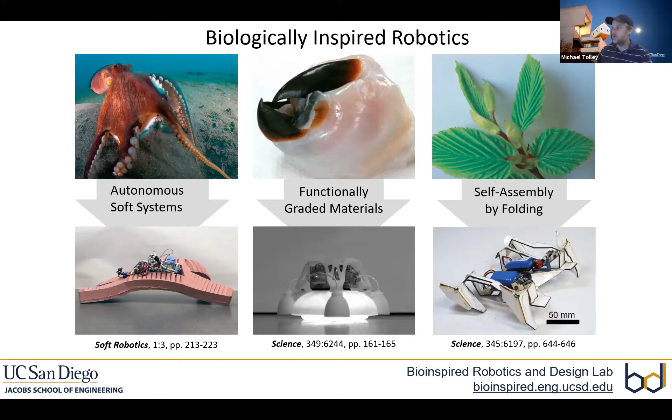I know this school is focused on rehab and wearable robotics. We have some projects that touch on that, but I'm going to focus more on the fundamentals of soft robots and how to make them and design them.

I would argue that the assumption of rigidity has, for most of robotics, been central and fundamental. The reason is that the things that allow us to sense the world, to sense movement and deformation in robotic systems, are usually expensive. So the typical approach to robotics, as in the video you see here, has been to design our robotic systems to be as rigid as possible.

What that allows us to do is assume that all the motion in a robotic system happens at the joints. You put a sensor at the joints, you can come up with a model to predict the motion of that system, and then you can get very high precision and accuracy in the control of the end effector position. If you want to do a manufacturing task like you see here, that's very beneficial.

The flip side, the downside we don't hear about as often, is that in order to get that precision and accuracy, that assumption has to hold. You have to have perfectly rigid bodies. Wherever you don't have joints, you have to have no deflection.

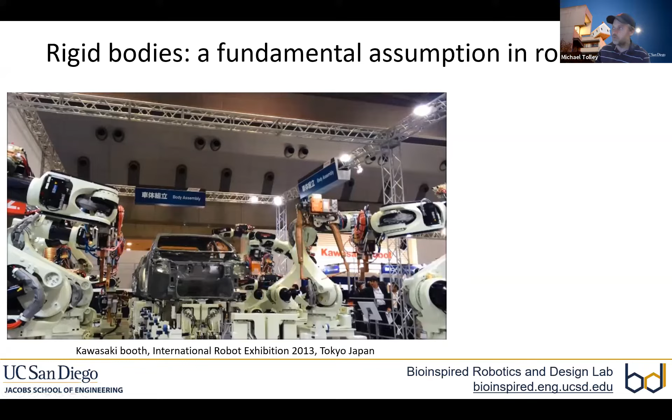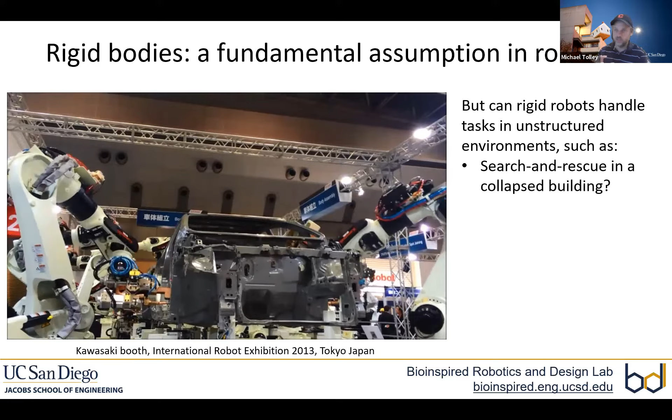And in my view, that's essentially what we're talking about when we talk about soft robots, is getting rid of this fundamental assumption. And especially if you're thinking about the kinds of things that this school addresses, search and rescue in a collapsed building, inspection of a damaged nuclear power plant, or assisting humans with daily tasks, there's a lot of potential upside to thinking about soft, deformable robots.

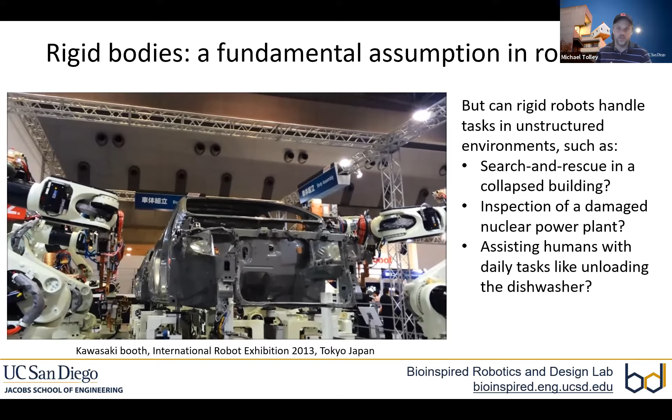Of course, that approach also presents a lot of challenges. So if you have a body like the octopus here that we see that can deform continuously, has no rigid parts, it can squeeze itself through all sorts of small apertures like the one you see here.

The downside of that is now you have to sense everywhere, right? You have to, in order to understand the shape of your body, have sensors all throughout, which is expensive, a ton of information. You have to figure out how to synthesize that information to understand the state of the system and in order to control it. So these are very non-trivial challenges that the soft robotics community is now starting to address.

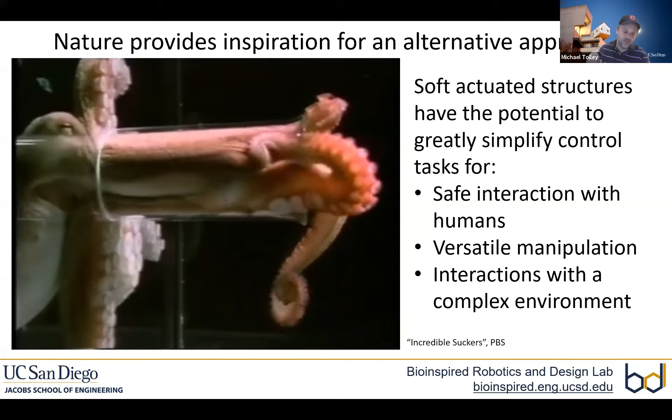And you usually end up, the approach people normally take is they simplify this problem in one way or another. But the potential of this, if you can do that, is you can have a system that is inherently safe for interaction with humans, that can achieve versatile manipulation, and that can have complex environments, interactions with a complex environment, and employ the materials that the robot is made up of in order to simplify those interactions in some way.

Okay, so I'm going to give some examples of recent work from my group that has sought to do this, thinking about questions like how can soft legs simplify walking? How can the control of stiffness be useful? How can a soft body be beneficial for swimming? And thinking about adhesion, sticking to things, and where soft structures can play a role. I will go through these fairly quickly, and if you have questions, I will be happy to address them.

This is an image from a review paper that I wrote with Daniela Rus about 6 years ago now. And even then, there were many people in this soft robotics community thinking about how to move around the world and interact with the world. This is just some examples. Often we're looking to biology for inspiration because that's where the examples of soft bodies are that we see. And so you see here robots inspired by fish, worms, snakes, manta rays, etc.

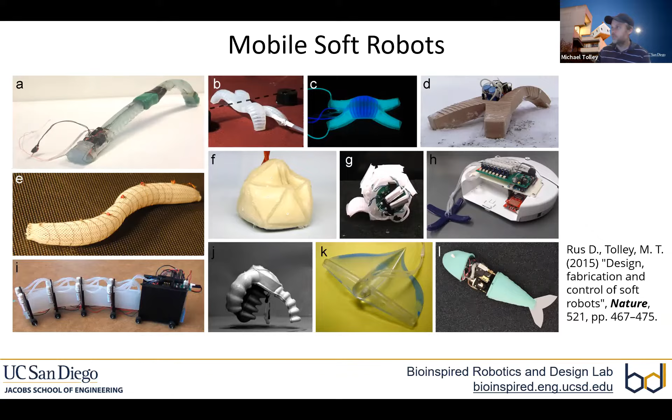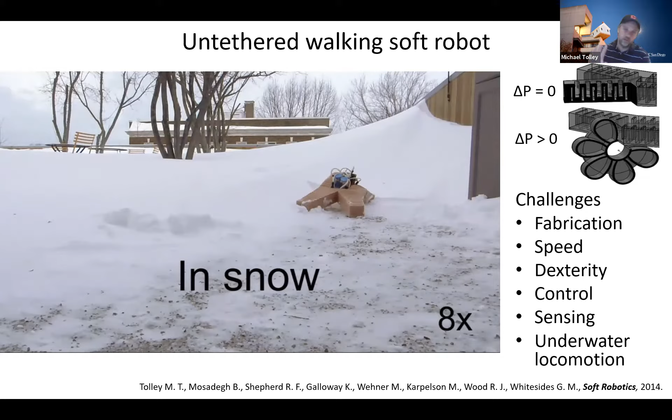So zooming in on one of those examples, this was some work from my postdoc in 2014, with Rob Shepherd, Rob Wood, George Whitesides, where we looked at can we make a large-scale soft-bodied walker?

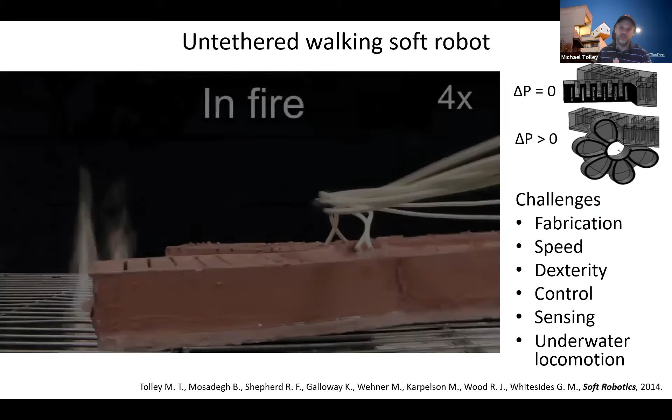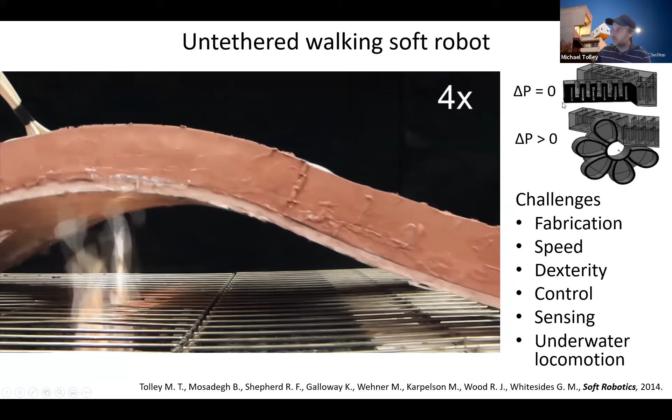And the way that we do this is using the most off-the-shelf components we could. We essentially have patterned channels within a soft elastomer body. And when you pressurize these channels, when you inflate them with a strain limiting layer on the bottom of these limbs, you can cause the limbs to bend, right? So it's a very simple concept, and we're just taking advantage of the fact that the pressurized air is going to naturally distribute to achieve a sort of continuous deformation over the body.

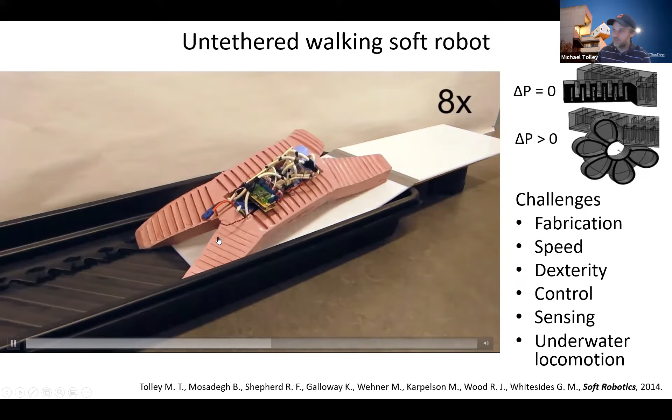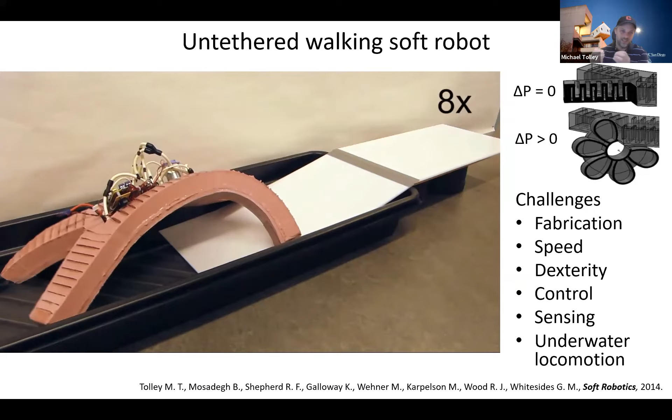Of course, it's not always as simple as that. You can even see in these videos some places where you have the Mullins effect with rubber, which means that you get one part of your body that gets a little bit weaker, and now the next time you pressurize it, that's going to be the place that stretches a little bit more, and now it has more exposed area. And so it's a sort of positive feedback where you can have aneurysms.

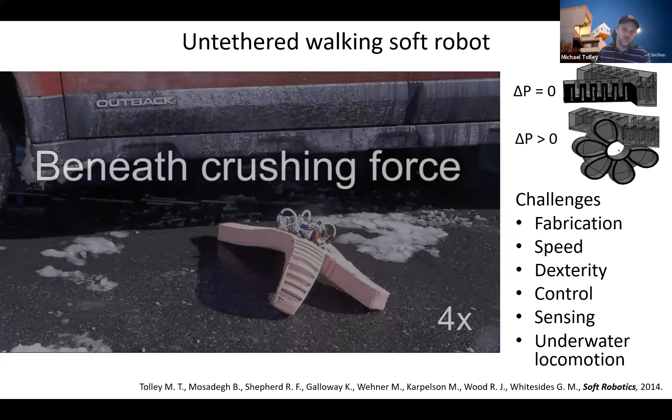And these are things that we see in biology, right? These are things that we want to avoid in our own cardiovascular system. And so challenges that nature has solved by, for example, using fiber wrappings around our vessels and pressure vessels in our body to try and minimize, but at some point you're not going to get rid of them completely.

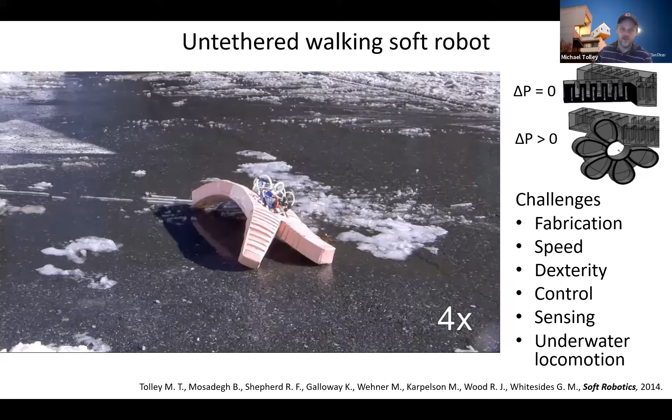The point here is that when you address some of these challenges, you can design a soft-bodied walker, and it has some nice advantages, like you can drive over it with a car, and it's going to be able to continue walking. One of the main challenges with this approach was the manufacturing, the fabrication.

So we started to move towards, rather than 3D printing the molds, we thought about, could we directly 3D print the system? The advantage of that is we have multi-material 3D printing technology coming online that allows us to do things like not just print flexible or rigid components, but combinations of the two. And we can print them in stiffness gradients, where we gradually transition from rigid to flexible. That's something you see in nature, because you don't want the stress concentrations that occur when you have a very abrupt transition.

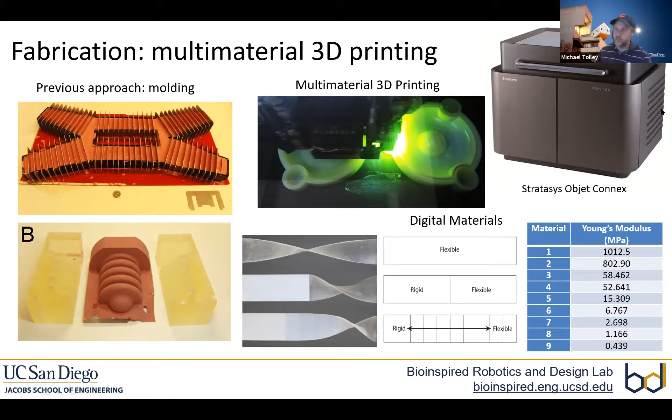Using this Stratasys Objet Connex printer - not meant to be an advertisement - we were able to print over 3 to 4 orders of magnitude of modulus. There are other technologies coming online every day bringing new and improved materials. With this particular printer, one challenge is these materials tend to be very viscoelastic, so there's a lot of energy loss in deforming them compared to something like silicone rubber. That's one of the trade-offs there, but these materials continue to improve.

One thing we were interested in, back when I started at UCSD, is we started thinking about how to print an actuator that can bend about 3 axes. Instead of a single controlled degree of freedom actuator, can we control the bending in 3 planes? We used a design previously proposed by Suzumori and others, which is essentially 3 tubes. If you extend one of the tubes, you're going to bend in the opposite direction if it's attached to the other 2, so what we end up with is a module that can bend in space.

Also, if you pressurize all 3 tubes, it can also extend. The nice thing once we start 3D printing these things is we're not bound to simple geometries, so we can get over the fact that the material we're printing with has a limited strain to failure compared to something like silicone rubber, using these bellowed designs - something that can essentially unfold instead of only stretching. So this was the design we came up with.

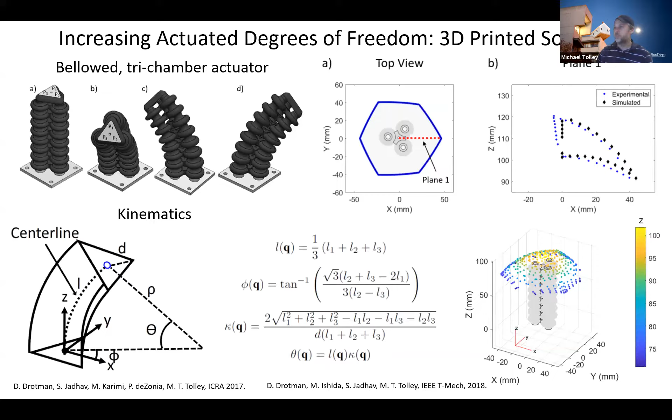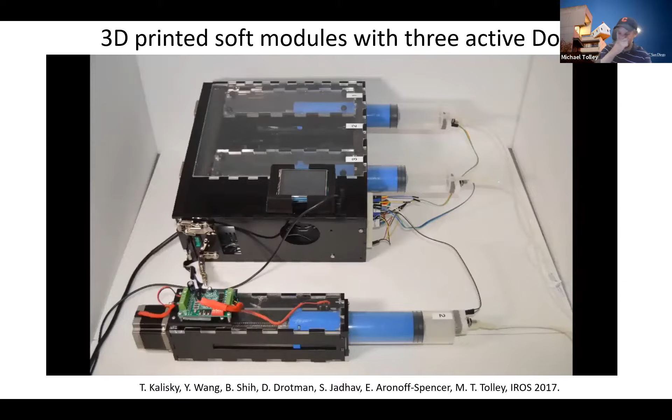This is a little video showing the control of one of these modules to, in this case, as an example, control the direction this laser pointer is pointing on the screen. That process is fairly repeatable. In this case, we were using feedback control on the pressure in the 3 chambers that we're controlling with these stepper motors, as you can see here, not on the position of the laser. We could do better if we did visual servoing there.

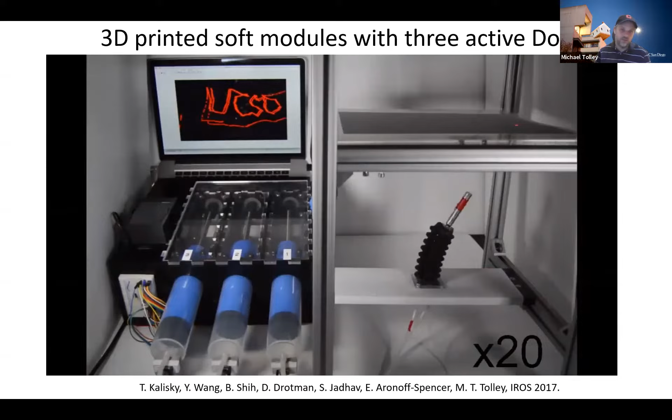But we showed that you can use this module for various things like manipulation, and we were interested in making a new version of the walking robot that could now, because you have these, bend in space. Essentially you have 3 degrees of freedom per leg. You actually have more control over the legs, and you can walk over more varied terrain. So that was the next step here.

We presented this at ICRA in 2017, where in this case we have tethers coming off the robot. We have a pump and valves and microcontroller and all this off board in this case. But we wanted to look at, if you have these soft legs, you can get over rougher terrain like pebbles, etc.

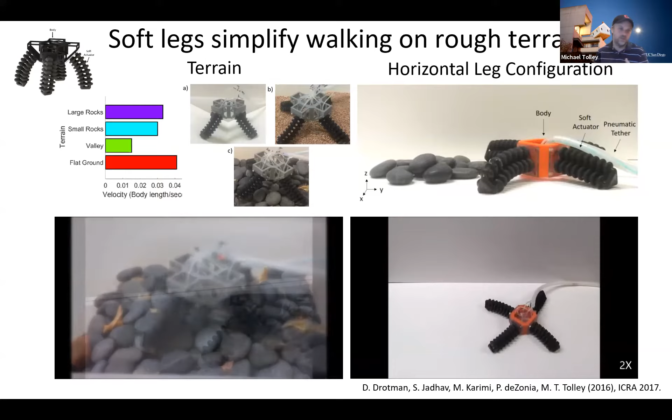How can these soft legs be beneficial? The hypothesis here was that we could come up with a simple gait, and it would allow us to make reasonable progress on different terrain, and that we found to be true.

This is one example. Let me see if you guys are seeing my mouse right here, but you can see the speed of the robot on different terrain.

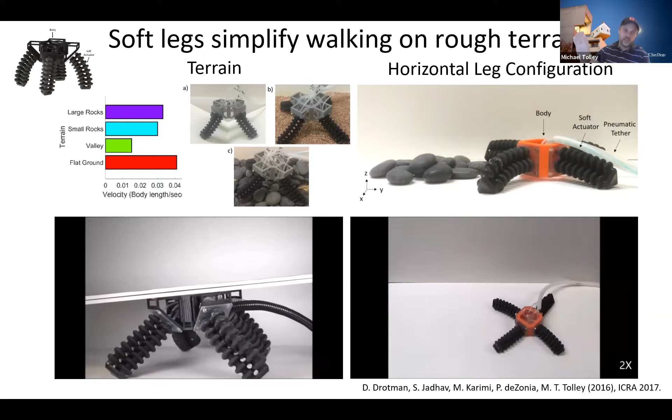This is great. There's a couple challenges still to address, a number of challenges still to address. One of them is I challenged my student Dylan, who just graduated, to think more about how we can make an untethered version of this system. Ideally, we want something that can operate out in the wild, and we don't want to have to carry around all the electronics, etc., off board.

We were inspired by some work that came out of the Whitesides lab after I left Harvard, which was looking at these pneumatic valves with a little bistable membrane on the inside. Essentially, these valves can act like an inverter element. So if you put 3 of these valves together, you get a very simple circuit, a pneumatic circuit in this case, that propagates a pressure state through the circuit.

Basically, the way it works is if you hook up the circuit in this way, where each valve is acting on the other side of the next valve, once you pressurize one valve, it essentially pressurizes the previous valve in order to flip its state, in order to invert its state. So these little valves, they have a membrane.

When they're deflected one way, it kinks the tube on the top, and when they're deflected the other way, it kinks the tube on the bottom. That's basically the idea here. So you can get a negative sort of feedback. And if you look at the pressure in each of these 3 valves of this ring oscillator circuit, you get this state where it increases in pressure and then decreases.

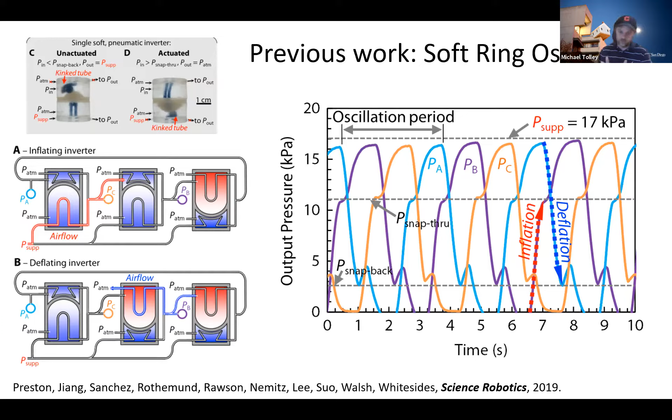This is great because this is essentially what we see in biological systems. When we go out and walk, we have what's called a central pattern generator neural circuit that generates a rhythmic output. Then that gives us our basic rhythmic motion, and we use higher processing response from sensors, etc., to adapt that rhythmic motion to respond to obstacles or things like that.

So we used this approach essentially to rhythmically pressurize the actuators in a soft-legged robot. The robot you see here in this video, the legs are not 3D printed. We started using off-the-shelf bellowed tubes, essentially, that we've connected in a similar design to what you saw previously.

The diagonal pairs of legs of this robot are connected together, so they're moving together. Even though only one leg is lifting off the ground, that's just because of the way the gravity vector falls. But essentially we have two legs moving together and then the other two legs moving together, propagating pressure states through the chambers of the legs.

Now you might notice that it looks a little bit clumsy, and that's because essentially we have connected both pairs of legs to the same oscillator circuit. If you look at the lower right here, we have one oscillator circuit in this video, 3 valves, and that means that the phase offset between the pairs of legs cannot be 180 degrees, which is what we want. It can only be 120 or 240 degrees.

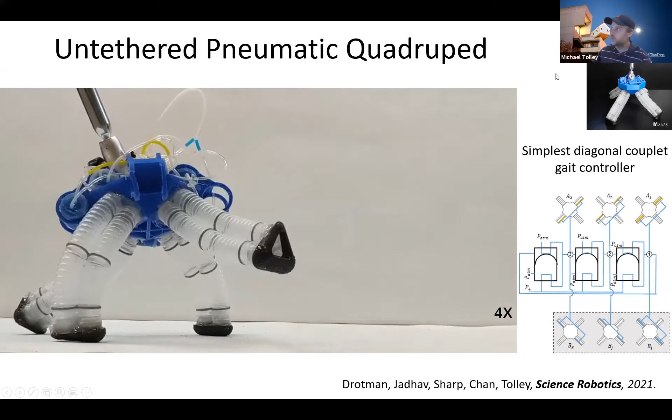That's a detail, and if you look at this paper, which appeared this year in Science Robotics, you can see some of those details, but we looked at how to optimize the phase offset between the pairs of legs. Essentially, once you have your basic oscillator circuit, you can control the locomotion of the robot.

We started to look at how you can tweak this circuit with as simple a pneumatic system as possible in order to reverse the direction of locomotion. What we came up with was one element, which essentially looks like a 4-2 valve, meaning 4 ports connected to 2 ports, and you can switch the connections between the two.

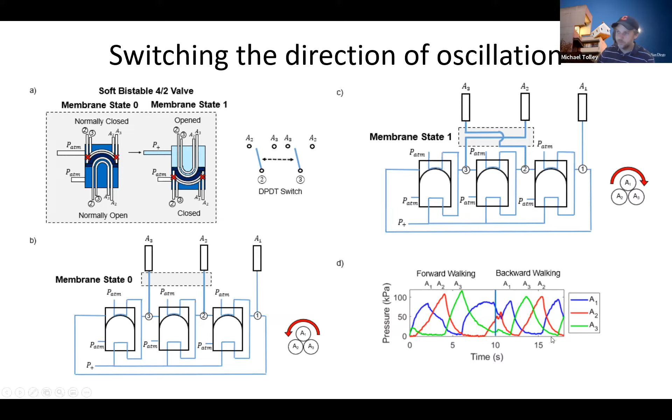We can put that into our system right here in order to essentially reverse the direction of motion of the legs. Here you see actual measurements from the system as we do this, where we're going blue, red, green, and then we reverse the direction. All of a sudden, we're going blue, green, red. So what that allows us to do—I'll come back to this video in a second.

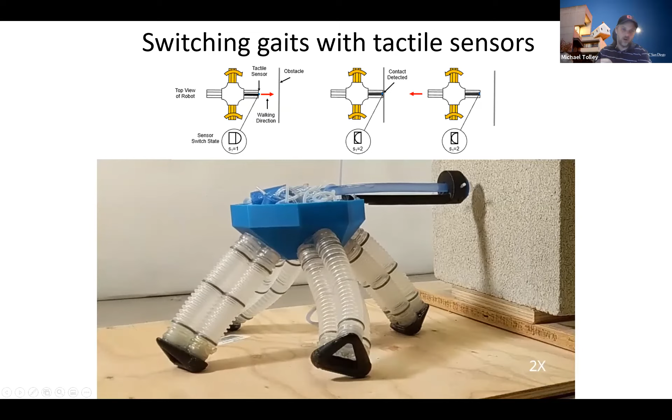What that allows us to do, if we flip the direction of locomotion, is you can be walking one direction. Here you see these 2 legs moving in one orientation, and then flip to be walking in the other direction. How we're flipping in this case is we have a little soft sensor at the end of this boom. When it hits the wall, it changes the state of a valve, another valve in the circuit.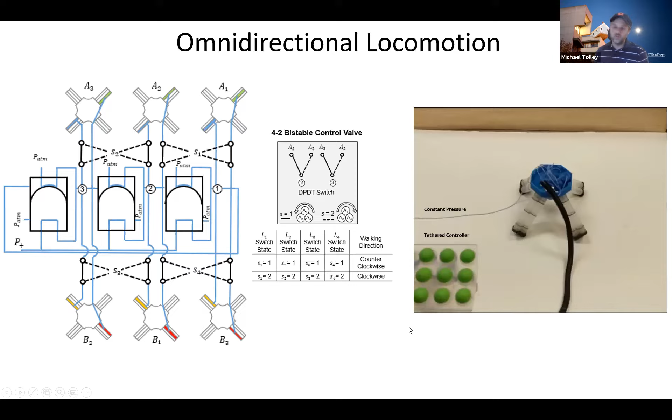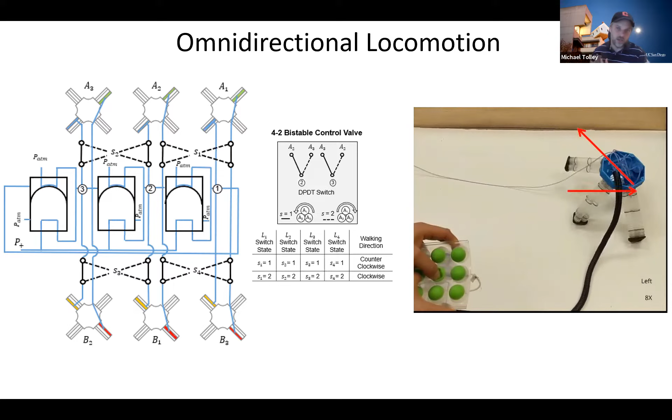So we see some potential applications here where you don't need any electronics on board the system. In terms of thinking about surgical applications, there may be cases like in an MRI machine where not having electronics is advantageous. Or we argue in sort of a mine shaft, some case where you don't want electronics that could potentially cause a spark—then this kind of pneumatic brain might be useful.

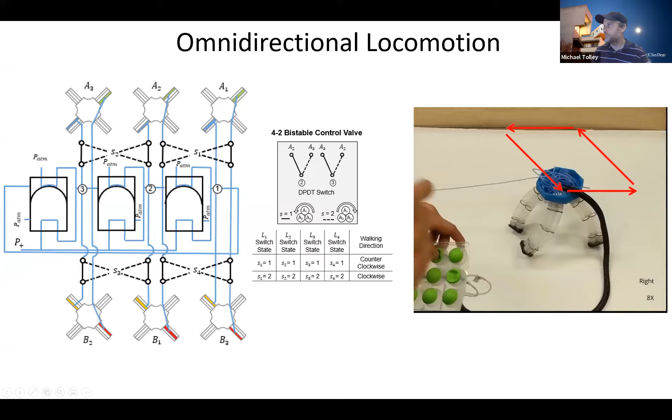So another challenge we thought about here is, well, my original idea was if we can have soft legs, immediately that solves all our problems, right? So we can get something that can, for example, walk on sand, and it's going to be no problem. As some of you may be wondering right now, well, what's going to happen when we put this thing in sand? This is a very simple experiment, but I think it gets the idea across here, which is just because you have soft legs, it doesn't necessarily solve all your problems.

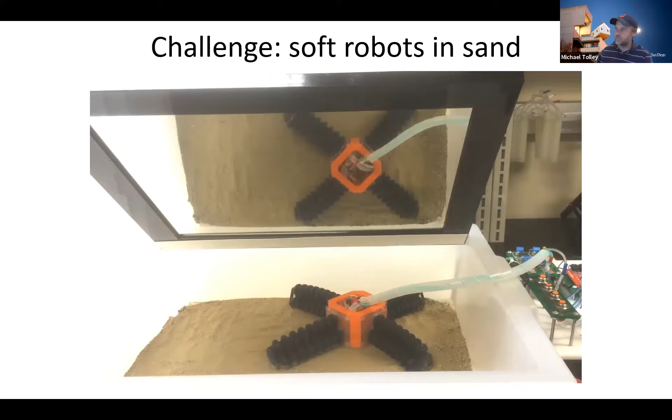Rather than being a good walker on sand, this robot was more of a good digger. And even in the previous orientation you saw where the legs are pointing down, we didn't get the sort of performance we were hoping for in sand. And so that started to motivate us to think about how robots interact with more complex terrain, like what we call granular media or sand. There's a little bit of motion here, but not what we were hoping for.

So that's where we started to think about control of stiffness. And the first project here was inspired by some granular jamming work that actually came from the lab where I did my PhD at Cornell in 2012. And the basic idea here is very simple.

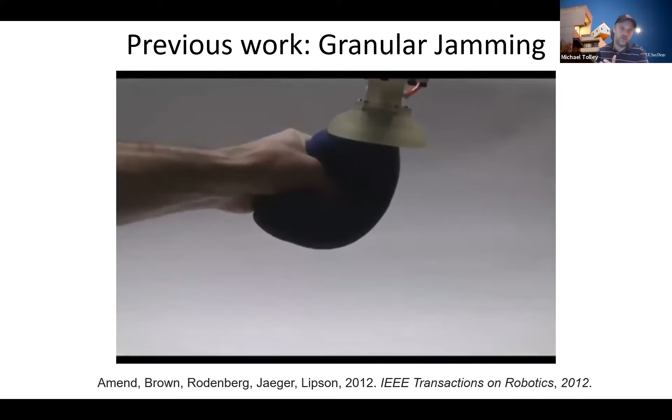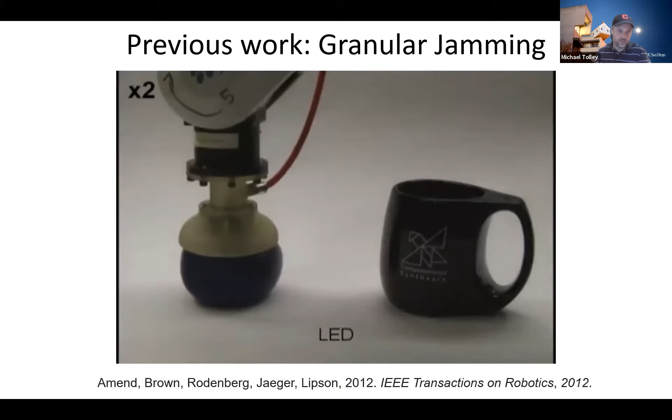It's you have coffee grounds in an elastic membrane. If you pull a vacuum in that elastic membrane, all of a sudden the grounds jam together, just like if you have vacuum packed ground coffee in the fridge—it's like a rock. And this can be used to make a very versatile jamming gripper, as you see in this video.

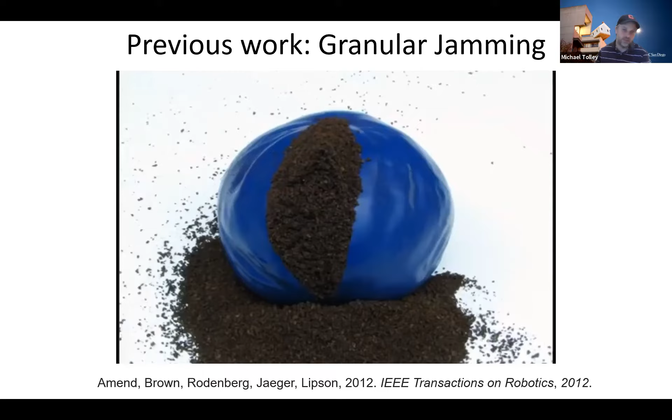So our idea here was, well, if we can now control the stiffness of part of our robot, let's say the feet, maybe we can get improved interactions with complex ground like sand or leaf litter or some other complex terrain, and do something like change our feet to be soft when we land on the ground so they can conform to rocks, pebbles, whatever it is, and then make the feet rigid when we want to push off. That was the basic hypothesis here.

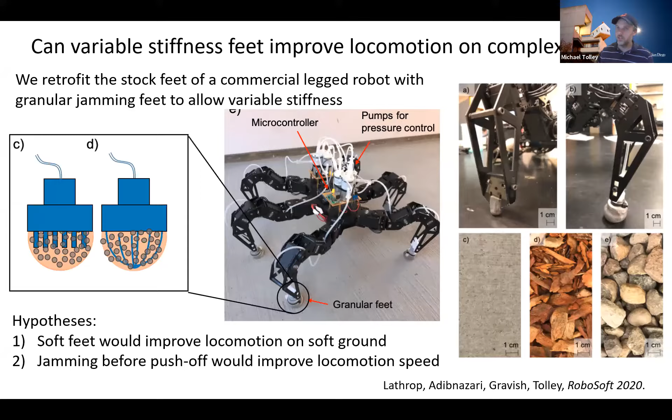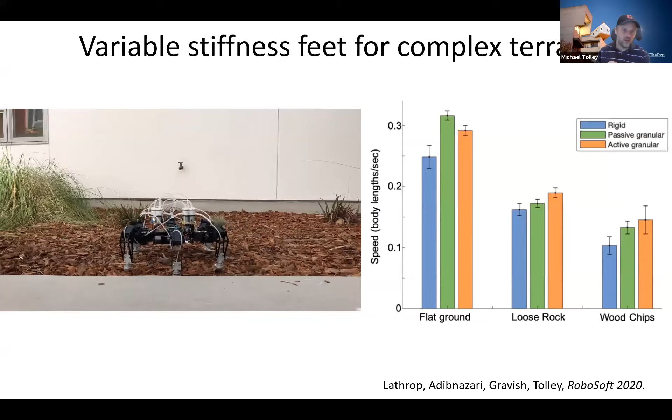If you look at the data on the right, the active granular is the orange. We found on flat ground with rigid stock feet, active granular, and passive granular—the green—meaning we're not actively pulling a vacuum, just allowing the weight of the robot to jam the feet. Interestingly, on flat ground that was actually better than active granular. Maybe it has to do with timing, I'm not quite sure, but we had better performance with just passive granular. Whereas on loose rock and wood chips, we got better speed overall with active jamming of the feet.

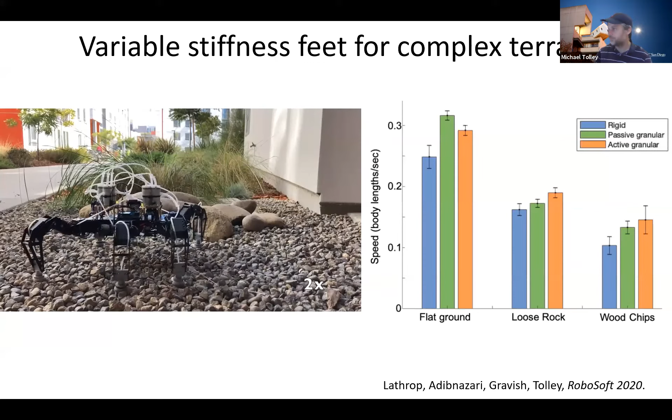This is one way to achieve jamming, but there are other ways to have a similar effect. Basic granular jamming is particles within an elastic membrane. The weakness is if you have a granular jammed beam and apply a bending load, at some point the grains come apart—they can't resist that motion. They can resist compression well, but not tension. The top of the beam is in tension, which means the only thing resisting that is the elastic membrane itself, which should be very soft.

So granular jamming is not particularly good in bending, but there are other jamming approaches people have thought of to change bending stiffness. One way we do this: if you have sheets of material with a high coefficient of friction, like sandpaper, stacked inside a membrane, it can be relatively easy to bend—but if you jam it together with pressure, or using electrostatic forces or other approaches, it becomes much harder to bend. It's like changing the thickness—instead of bending many thin beams, you're bending one thick beam, which is much stiffer.

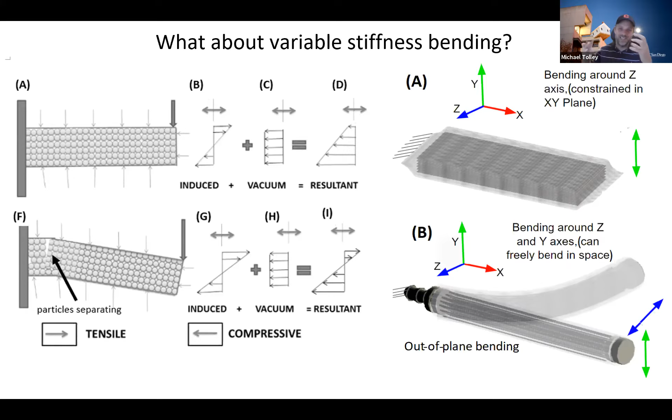That allows control of stiffness in one direction, but if you want to change stiffness in multiple directions, you can use fiber jamming—essentially abrasive cords or cords with a high coefficient of friction, jammed together in a membrane. This is that example of layer jamming, and this is some unpublished work with different materials with different coefficients of friction.

In this work, which we published in Soft Robotics and is available online, we looked at how to model the stiffness curve you'd expect when jamming layers or fibers together—fibers, viewed from the side, can look like layers. The transverse shear stress is highest in the middle, so as you keep adding load, the layers start sliding where that stress is highest. This lets you predict the shape of the force-deflection curve. Of course, when you do this in experiment, the data isn't as multilinear as the model predicts, because of the realities of the real world.

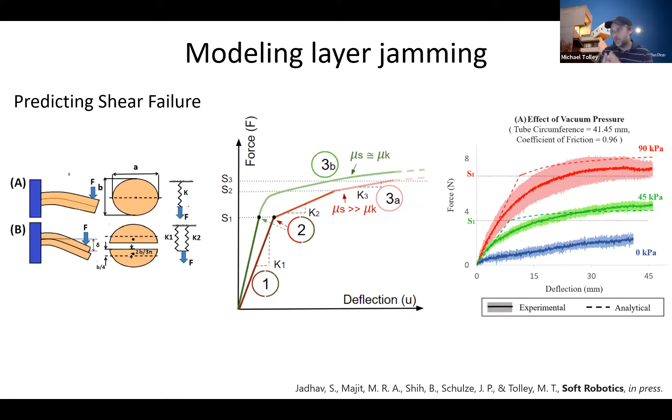That means that the whole layer doesn't sort of have the exact same coefficient of friction, etc. But you can sort of predict how these things are going to fail.

One of the things we've looked at that maybe is more relevant to this school is actually making surgical manipulators, or rather I should say variable stiffness retraction devices. This is a very simple device we've worked on, where we have jamming layers within parts of this device.

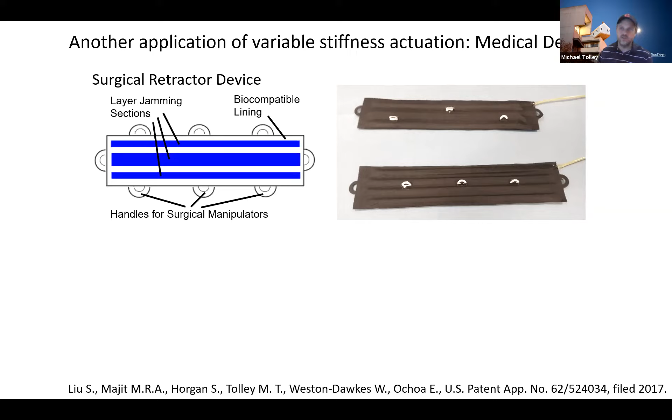I'll say, before I play this, if you get squeamish around videos of the inside of pig bodies, you might want to look away for a minute.

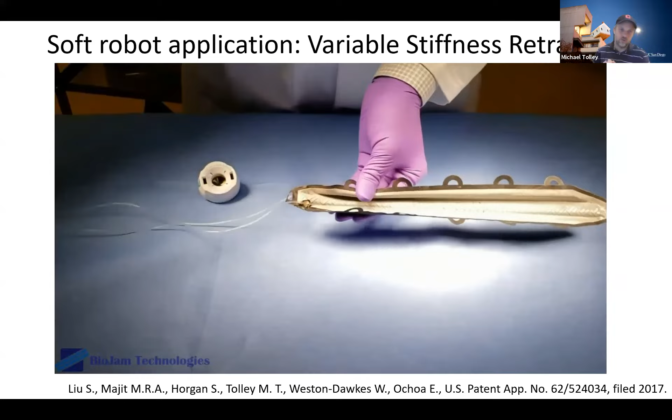This is an example video of using this type of device in minimally invasive surgery, where we want to fold up this variable stiffness device, put it through a trocar, which is the hole that you make in a body to introduce your surgical equipment for minimally invasive surgery.

Now we have this relatively flexible device, unjammed, so no negative pressure applied. If we pull a vacuum, it jams and it's relatively stiffer, right? And then we can unjam it again. This is a video from testing in a pig.

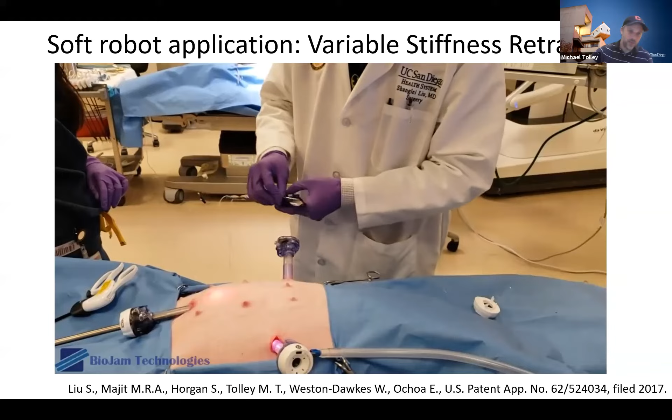We want to show how you can use this kind of jamming device to, for example, hold the liver out of the way when you perform an operation on the stomach. So this is a challenge in surgery because the liver is always in the way.

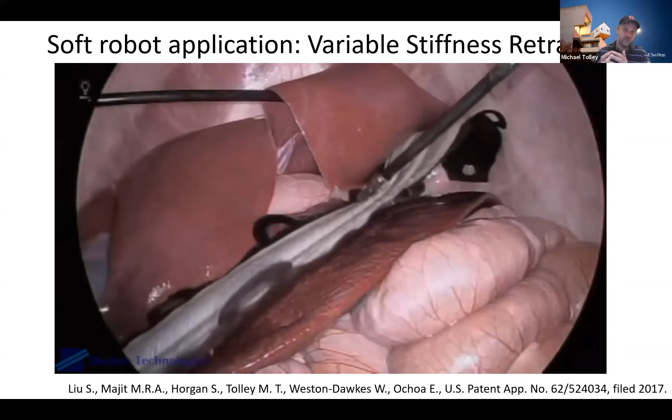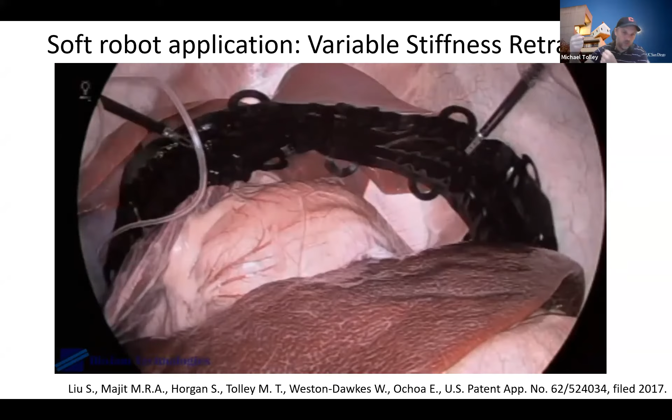Typically, if you want to perform this kind of operation, you need another doctor to sit there with a metal retractor and hold the liver. And then you have to coordinate between two doctors. Oh, you're not holding it in quite the right way. Please hold it higher, move it more this way, in order for the physician performing the surgery to get a good view of what they're doing, right?

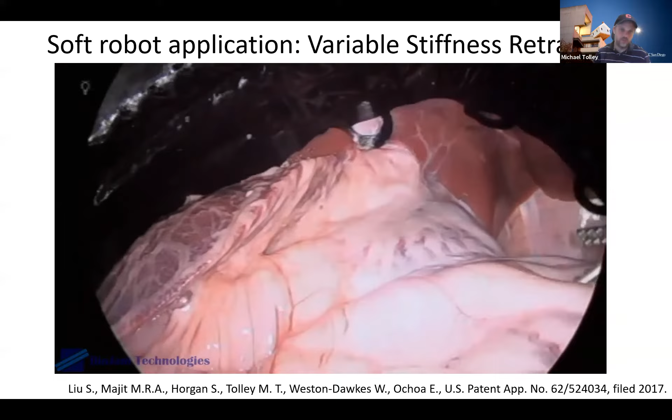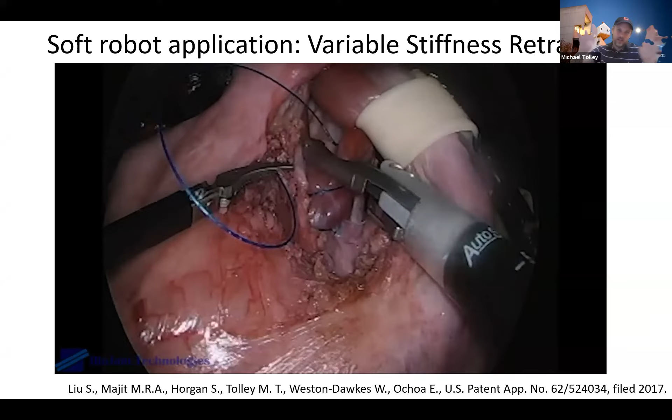So you have now a camera coming through one port, surgical devices coming through other ports. And with this device, the idea is you can put it in, the surgeon can manipulate, move it into the right position to hold the liver, and then you can perform the operation underneath. I believe in this case, it's a gastric bypass surgery.

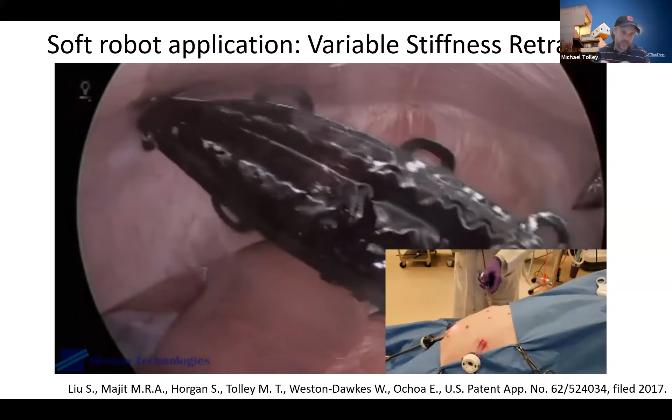And then ideally, we want this device at the end of the procedure, you can again unjam it and sort of pull it out of the body relatively easily.

Okay, so this is the idea, and something we have a company working on commercializing.

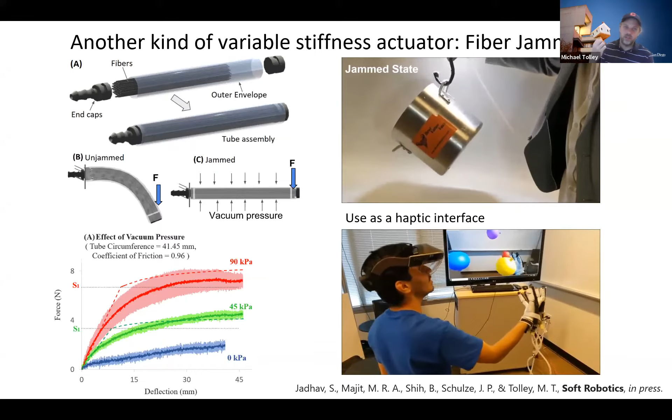And now if you make the actuator atmospheric pressure, essentially you remove the vacuum from these jamming actuators that are along the fingers of this glove. Now your fingers can move more freely, so it appears that the balloon that you were holding in this example has popped.

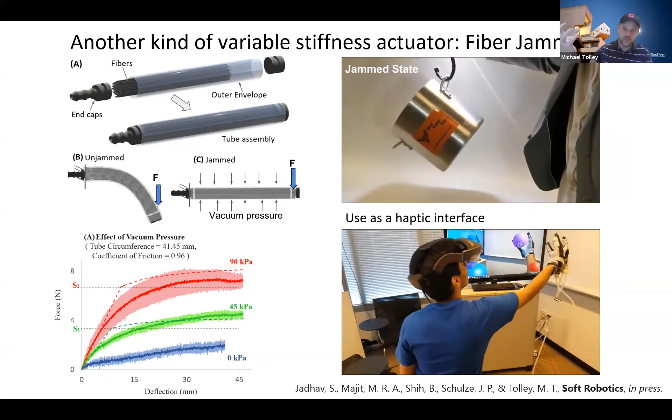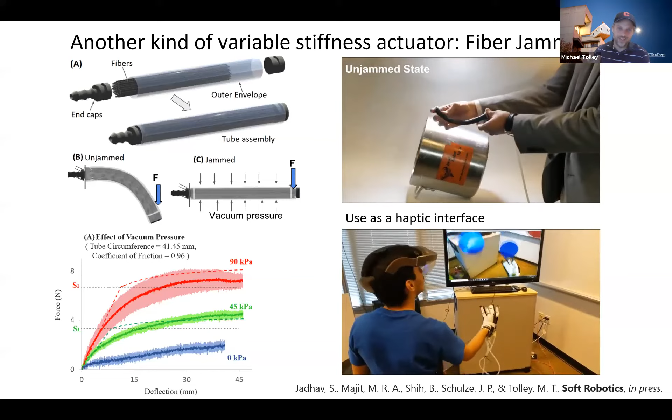Okay, so this is one example, and my student Saurabh is an expert at making these sort of VR applications like the one you see here.

Okay, let's see how we're doing. So it's 7:40 my time, so I think that's maybe 4:40 your time. Let me talk quickly about a couple other projects.

So we've thought about swimming. As Michelle mentioned at the beginning, we have some support from the Navy in the US, and they're excited about fundamental research in soft-bodied swimming.

And so we've looked at jet propulsion inspired by cephalopods, and there's some interesting prior work here. But if you look at some of the keys for how squids swim, they take advantage of the added mass effect, which is essentially the amount of water they have to carry along with the robot. And what they do is they fill their body with water, and then they force it out a jet, right?

When they're filling, they want relatively more resistance to motion, because filling your body tends to give you negative propulsion. If water's coming in this way, it pulls your body back. Then you squeeze the water out and it gives you positive propulsion. So the ideal case is you essentially look fatter when inflating and thinner when jetting. You want to carry less water with you when trying to go forward, and more water when you're not. So as the added mass decreases while jetting, that adds an acceleration term.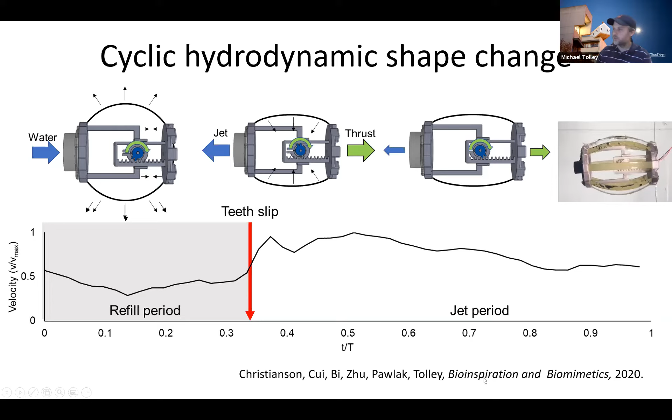If you look in nature, squids, and if you look at the fluid dynamics, the ideal for a squid starting at rest is a stroke ratio of 4 to 1. So you want your nozzle to be closer to the size on the right than the sizes on the left. I think I have another plot that shows that in a moment.

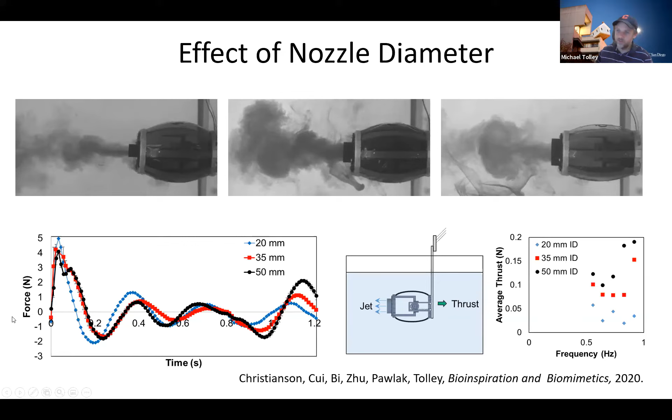If we look at the average swimming speed, now with an untethered version of the robot, where we have the battery and camera at the front, we find our stroke ratio, consistent with previous fluid dynamics analysis, is ideal at about 4. We get maximum speed there; if you go higher or lower, you tend to be less efficient. So these are the kinds of things that will guide the design of this kind of squid-like robot.

For us, we're very happy to make something and show that we can steer it. Here we're not doing active steering; we're just adding a nozzle pointing in one direction, showing that in principle we could steer the robot.

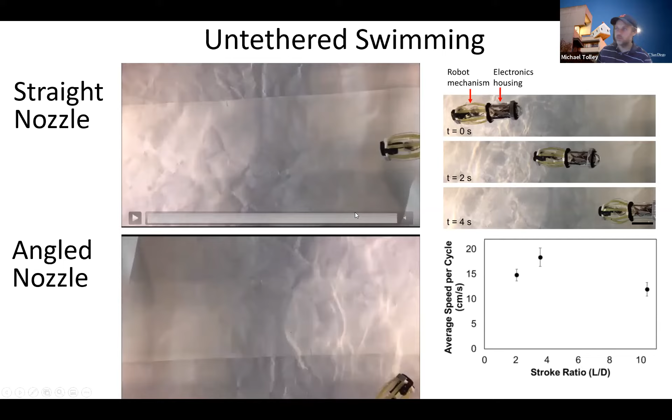Fortunately, at UC San Diego we have collaborators—this is at the Birch Aquarium—at the Scripps Institution of Oceanography, with whom we're able to test these robots in a more realistic environment. You see one of the divers helping with this experiment at the end of the video. This is actually in a tank, an aquarium tank, swimming with real fish.

We argue that this has the potential to make a robot that won't disturb the fish and isn't likely to harm them, but can be used to monitor wildlife, with potential advantages of not getting stuck amongst kelp and in rocks, etc.

Okay, so now I'll move on to the last topic for today, which is adhesion. There's a couple projects we've had recently looking at bio-inspired approaches—well, one's bio-inspired, the other not so much, but two approaches to adhesion.

The bio-inspired one—for this work, we looked at the clingfish, this little animal you see in this animation from previous work, that even when euthanized is able to stick to something rough and slimy like a rock. You see this euthanized fish attached to a 6-pound rock purely based on pressure, like a suction cup. If you look at the animal, it has these modified pelvic fins, and it generates this little suction disc between the fins and structures on its body.

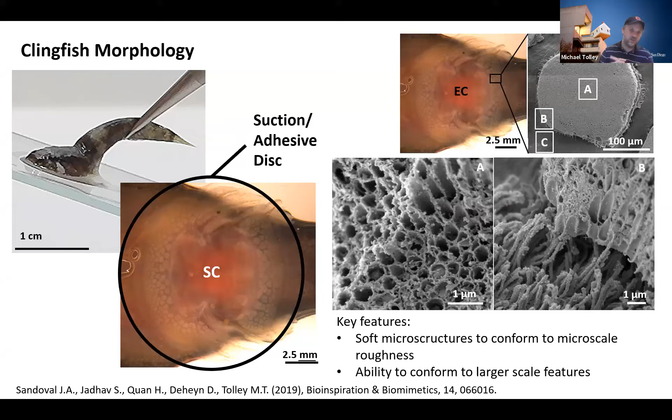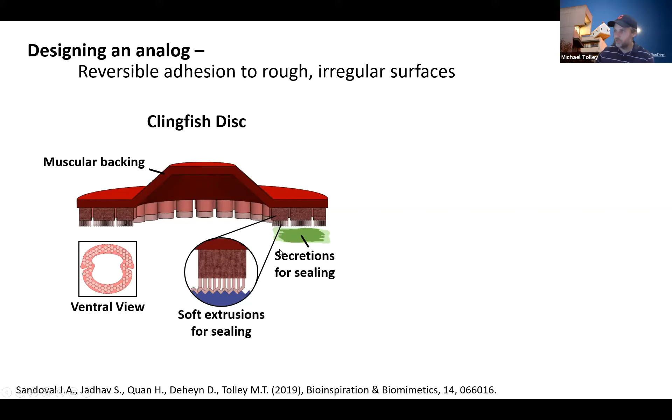We have some work looking at this—this is my student Jess Sandoval, who has looked at this from both the biological and engineering side to understand what these fish do and how we can replicate it. If I were to give you a model of what's going on: you want a relatively stiff backing to the suction disc, microstructures with features for channeling fluid around the outside, secretions to help in sealing, and soft extrusions to make intimate contact.

Now, the first bio-inspired suction discs that we made were much simpler. Instead of one stiffness, like a commercial suction cup you'd use in your bathroom, the simplest thing we can do is have a relatively stiff disc with a relatively soft membrane. The first hypothesis was: would that improve our adhesion on rough surfaces? Essentially approximating all those microstructures as a soft layer.

Then we started looking at other things, like different sorts of slits representing what the fish has, and adding microstructures. What we found with that first question was that just by patterning different stiffnesses of the disc in the right places, we were able to stick to rough surfaces underwater.

So this is our artificial suction disc, colored white here so you can't see the different layers, but essentially we have a relatively rigid and soft layer. We tested out these different features—if you look at the blue line here, that's the disc with the best performance.

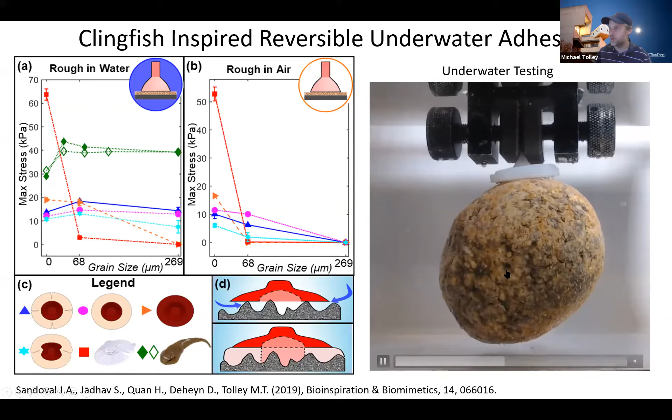The same is true in air, though our emphasis was on getting something that would work underwater. For this work, we got something that could stick to an array of surfaces. I won't talk more about it here, but Jess has since been looking more at other interesting features, like fluid channeling and microstructures to achieve more intimate contact. We hope to tell you more about that soon.

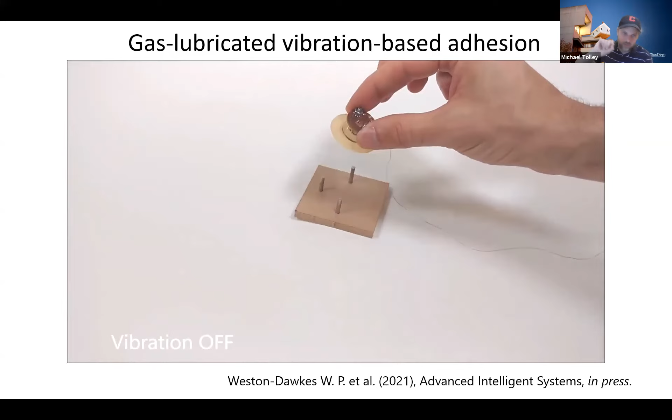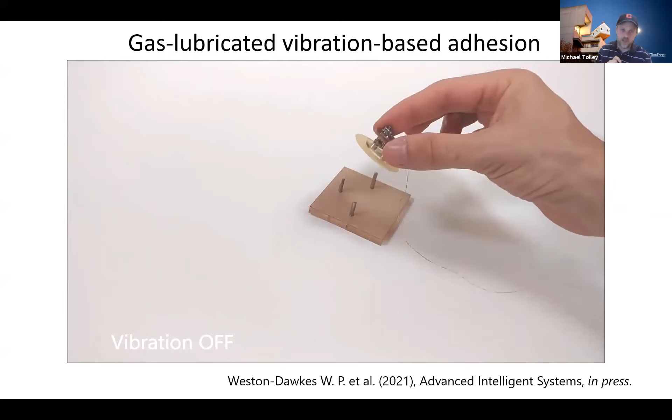The last thing I'm going to talk about is another adhesion approach, which isn't really bio-inspired, but it's a very interesting concept. It turns out if you take a thin membrane and add a little bit of vibration, like you'd get from a pager motor or an eccentric rotating mass, and put this disc in close contact with a relatively smooth surface, you generate adhesion.

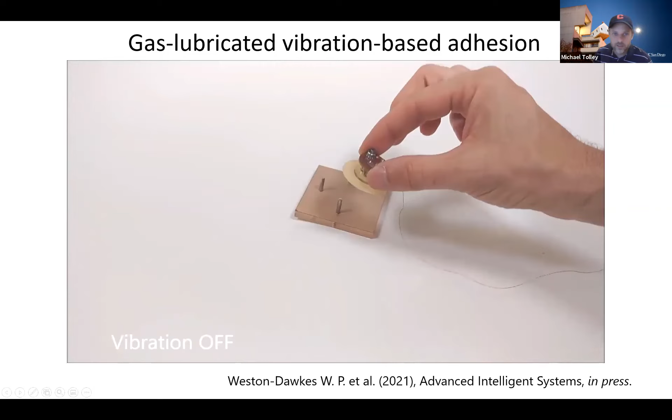Let me see, there's something in the chat here. Okay, I'll come back to that question in a second.

So just to wrap this up, the interesting thing is you generate a low pressure region underneath this disc. You get the fluid under the disc to move by vibrating it, which generates a low pressure, and it's controllable when you turn the vibration on. You get adhesion like this 14-gram disc supporting 500 grams, half a kilogram.

But the most interesting thing, as illustrated by this video, is you get normal adhesion without shear adhesion. Normally, if you use gecko adhesive or glue or electroadhesion, if you're stuck this way, you're stuck that way too. If you want to be a mobile robot, that's not good, because you need to move, peel off, reposition, requiring multiple legs or pads. But if all you want is to move across a smooth surface, it's nice to have an adhesion mode that sticks only in the normal direction.

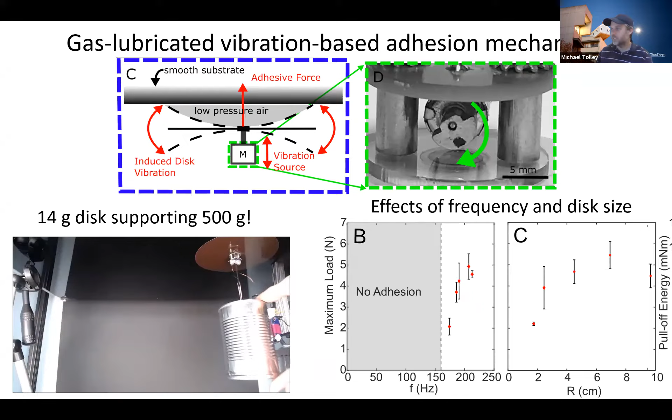We did some quantification of the effect of frequency and disc size. There's an optimum for both in our particular design. We put pressure ports underneath the disc and found the negative pressure is generated right in the middle. If you look at the normal stress, it's larger the smaller the disc is, but if you look at overall force, there's an optimum — increasing the radius adds more adhesive strength up to some point.

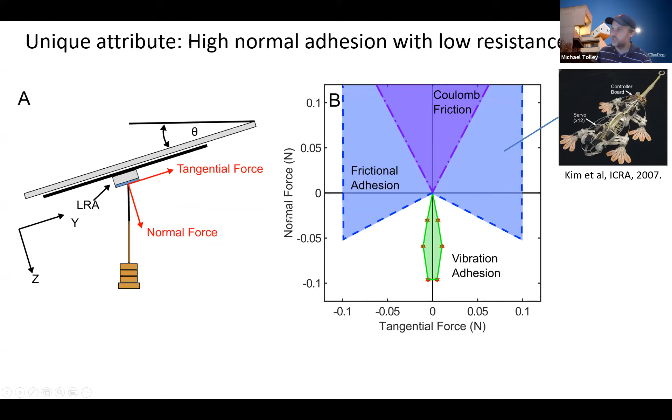This is the point I made earlier — if you look at our vibration adhesion, it's all in the normal direction, and no force in the tangential direction.

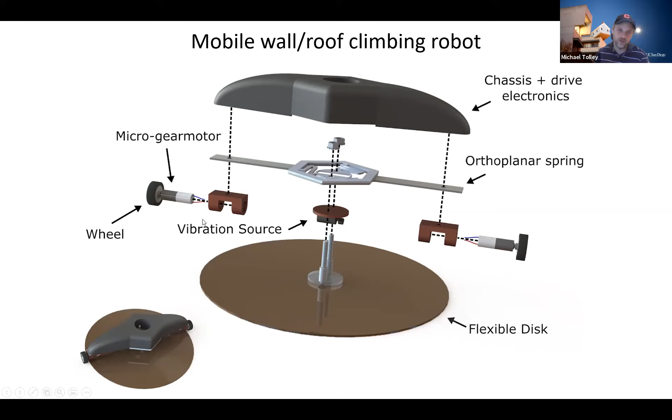One major caveat is that this vibrates at audible frequencies. Our original idea was maybe we could use this in the home, but it would be really annoying, so you'd have to think about how to make it quieter. Still, we think it's an interesting controllable adhesion mechanism.

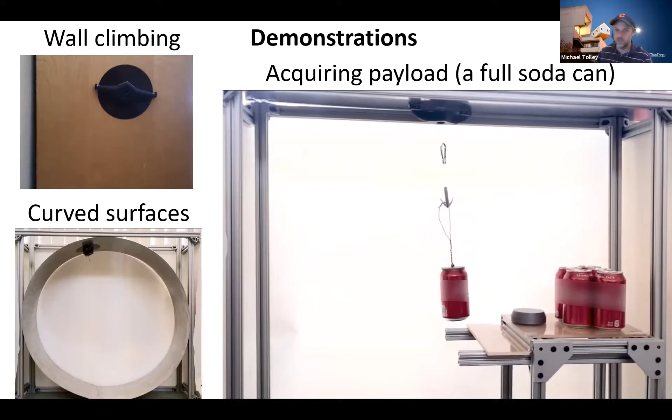Okay, I'm going to leave it there, and I'm very happy to take any questions we have time for.